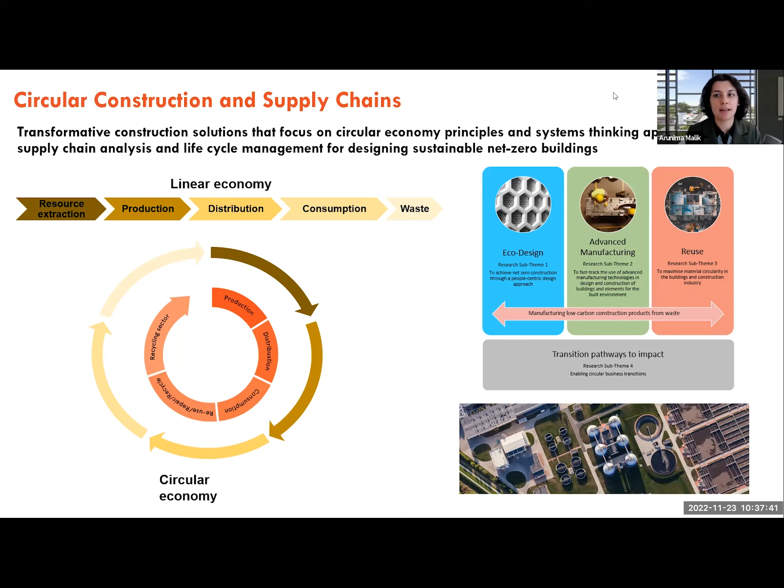There are a number of research themes at the University of Sydney led by colleagues who are part of the Smart Sustainable Buildings Network. For example, Professor Ali Abbas is one of the co-chairs of the Circular Construction and Supply Chains cluster within the network. This research looks at eco-design, advanced manufacturing, reuse, and transition pathways to impact. There is a waste transformation research hub, and the idea is to come up with transformative construction solutions that focus on circular economy principles and systems thinking approaches, using supply chain assessment or life cycle assessment techniques for designing sustainable net zero buildings.

We are also working on the supply chain aspect in detail, developing an industrial ecology virtual laboratory at the University of Sydney, which aims to consider environmental, social, and economic impacts in a holistic framework. Environmental could be looking at biodiversity threats, emissions, energy use, or sustainable use of water and land. From a social perspective, we're starting to look at modern slavery as an indicator relevant to the construction sector and its supply chains. We have employment and occupational hazards, such as accidents at work, as an indicator we're working on in collaboration with the International Labour Organization, holistically within this platform being developed, the Global Industrial Ecology Virtual Laboratory.

These are the indicators which can be used for measuring the supply chain performance of construction materials and construction sectors. The idea is to look at embodied impacts, whether it be embodied environmental, social, or economic impacts, and not just direct impacts, but also impacts in the supply chain.

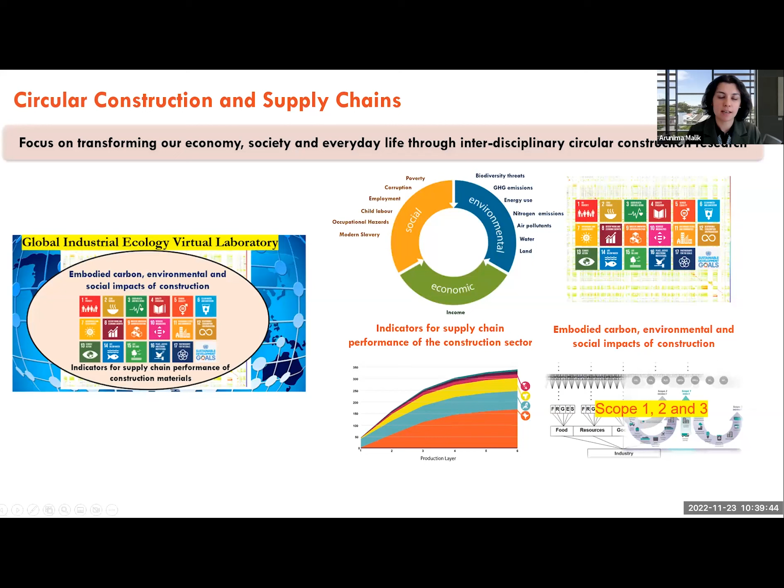This is all being presented as a brief snapshot as part of the Smart Sustainable Buildings Network, which brings together a number of clusters: circular construction and supply chains, sensors and automation, building efficiencies, building envelope, indoor environment, virtual design and construction, and legislation, regulation, and rating schemes. The aim of the network is to bring together expertise from different schools - science, engineering, architecture, law, and other faculties across the university - in a multidisciplinary approach to tackle the issue of circular economy in construction.

The smart building blocks include indoor environment, building efficiencies, and also a management point of view. This Smart Sustainable Buildings Network brings together not just academics, but also industry and government bodies.

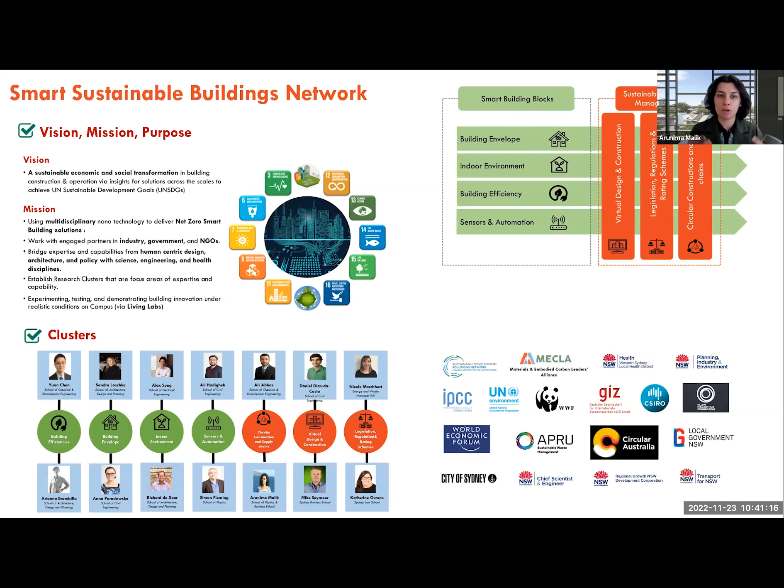Academics at the University of Sydney have active collaborations with the United Nations Sustainable Development Solutions Network, other UN bodies, Transport for New South Wales, local and federal governments of other countries, GIZ in Germany, the World Economic Forum, and the City of Sydney. The aim really is to have an interdisciplinary approach, not just academic, but also with strong links to industry.

On that note, we are very fortunate to have Valentina with us today. Valentina Petrone is WSP's Circular Economy Lead in Australia. She has unique skills combining 15 years of experience as a trained architect, focused on implementing sustainable and climate resilient practices in the built environment, with in-depth knowledge of circular economy design principles at different scales of intervention. She studied at TU Delft University, a leader in circular economy education in Europe, and has successfully delivered pioneering circular economy projects in Australia with a focus on community engagement.

We're very fortunate to have Valentina join us today to give us an industry perspective on the need for shifting from a linear economy approach to a circular economy approach, the design principles, and of course the case studies I'm very much looking forward to hearing.

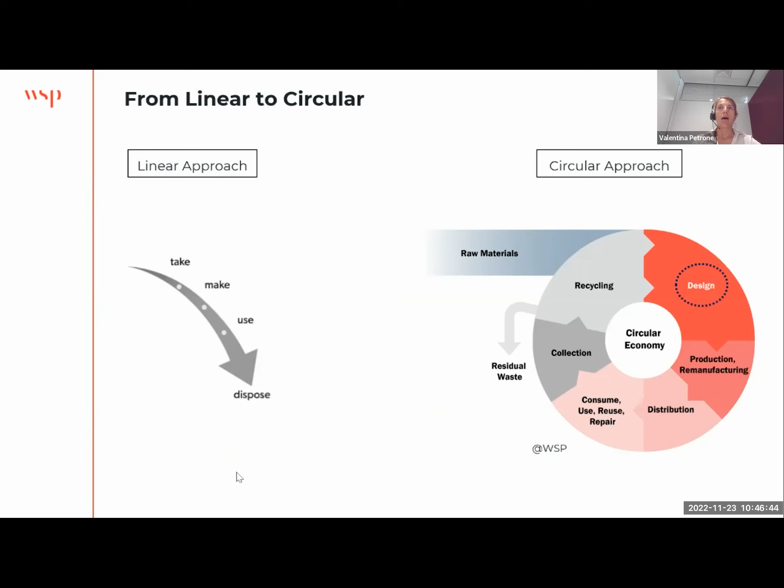Another very powerful image is the one on the screen, which links back to circular design thinking and the need to shift how we approach materials and the cities where we live. It's the shift from what everyone is familiar with, the 3 R's. We used to know the reduce, reuse, and recycle principle. They're still very valid, but now they are expanded.

Now we talk about up to 10 R's, and where we want to really focus to promote a circular design thinking shift is the first 4 R's. So refuse—what we can really refuse as end customers, but also as designers, how we can rethink the way we design our products and built assets. Reduce—how we can reduce the amount of raw materials we use. And reuse—how we can keep those materials in use at the highest value for as long as possible. Then down through the pyramid, of course, all the other options are available to guide our design thinking.

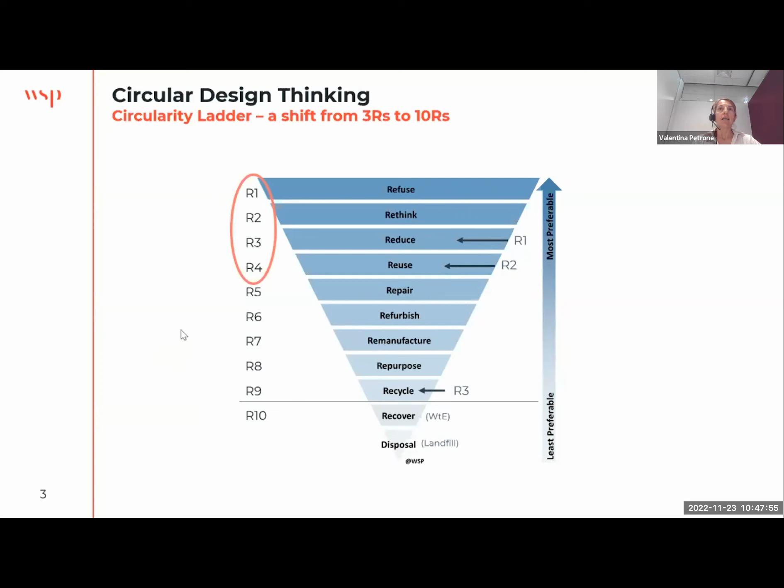And how this all links back to another big topic we are discussing today: what is the link between circular economy and net zero?

So we know that, as Arunima mentioned, the 55% of emissions caused by energy production and use are usually embedded under scope 1 and scope 2 emissions. The big next step is how we reduce scope 3 emissions, and we really dive into those to try to achieve those targets of zero emissions.

It's very important to see that embodied carbon is a key player in terms of where we can act to reduce emissions, but also demolition and construction waste generation reduction is very important. Fit out waste also plays a big role in scope 3 emission generation, and food waste sent to landfill, we all know, is not a good outcome.

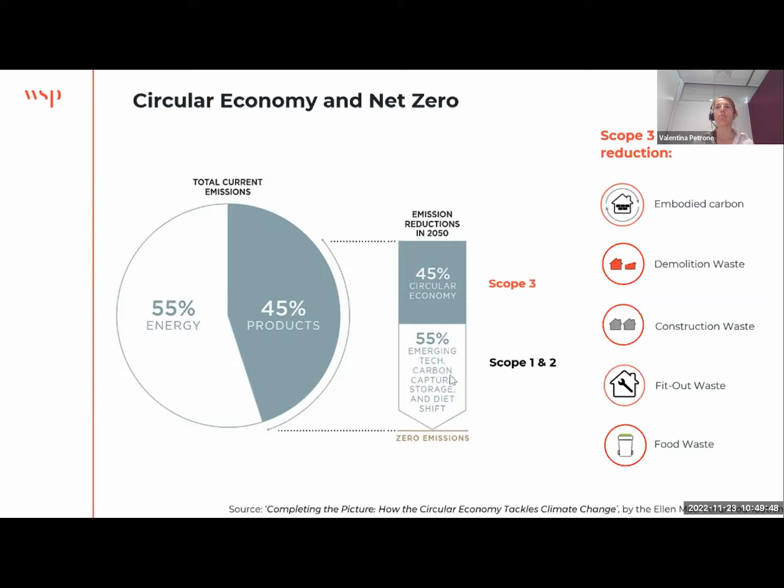As I mentioned, the goal is to start from the top of the hierarchy—really reduce what we create in the first place, and then try to better use the materials that we still have available in the cycle.

And when we get into the built environment, it's not easy to implement those 10 R's and that approach. My work, I'm very fortunate to work with design teams on multiple projects and facilitate and guide the design teams through the implementation of the so-called circular design principles and strategies.

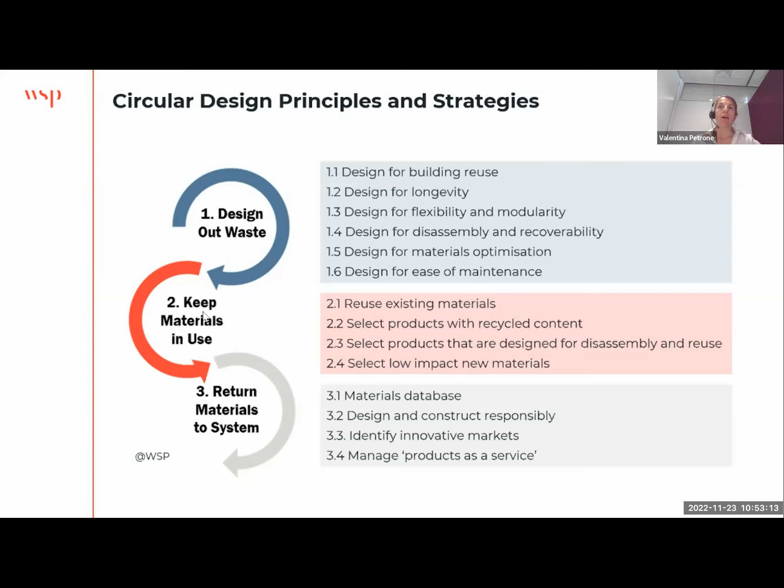In the following slides, I've just added a few visual examples. I always love to show some research about what things could look like. So designing for longevity is very important. As you can see on the right, this is a breakdown of the concept of building by layers. What about if we start as designers to design our building assets according to the expected longevity of each layer of the building? As I mentioned before, what about the skin?

We know the skin will last much less than the structure. So what about if we have a second skin which can be easily disassembled and replaced as needed, while we keep the structure as strong as possible?

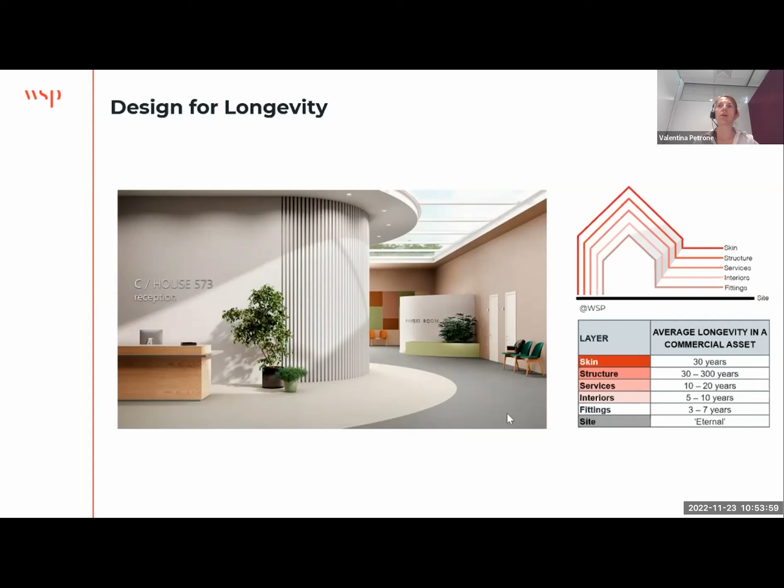Design for flexibility. This is one of my favorite examples back in the Netherlands: simple ways to install operable partitions and even operable planters to keep the space as flexible as possible.

And back into keeping materials in use, how can we start using product as a service? We are all familiar with lighting as a service, but even elevators can be rented. The important shift is that if we start to rent a product, we have an agreement where we establish the performance expectations, and it's up to the manufacturer and supplier to meet those expectations agreed in a contract. So it's up to them to use more durable materials, and they will be able to easily repair those elevators.

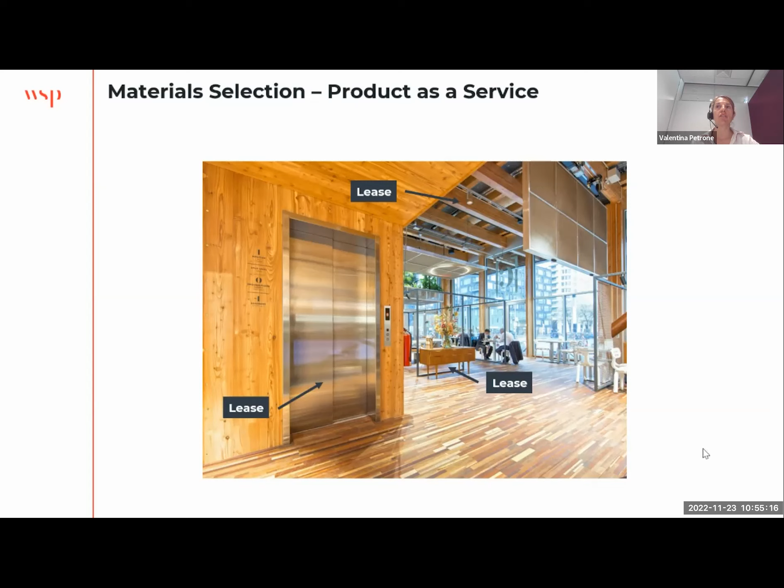So back to the example of the washing machine at the beginning, if we shift from ownership to leasing, we will push the suppliers and manufacturers to be able to repair those materials. Otherwise, it will cost them too much money to run their model. So it's a shift, an economical shift as well.

And looking at take-back schemes, a famous one is the carpet tiles here in Australia. If we think about any office fit out, usually, unfortunately, at the end of the tenant's leasing agreement, everything in the office gets stripped out. Most of the time everything ends up in landfill as fit-out waste, and then the new tenant just refits the space from scratch.

What about if we have a take-back scheme agreement? The same supplier of the carpet can come collect and remove the old carpet and reuse it, either as is if still valid, or at least recycle it back into their own system with a guarantee of a closed loop.

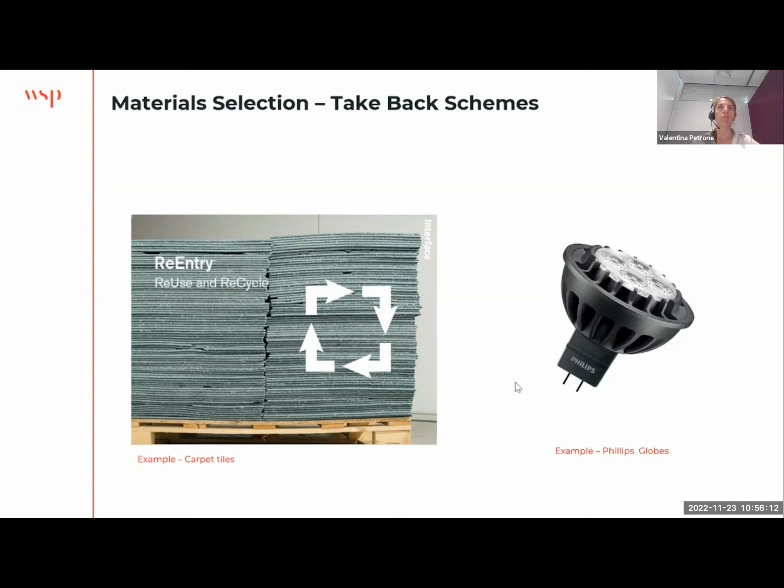The usual big question I get asked is how do we realistically do this in the construction industry? The answer is that key stakeholders really need to work together. Starting from the design, we try to make the best design choices to ensure circular economy is embedded at a very early stage. Procurement is a key step, but so is the construction phase, where we need to work with contractors and builders to support and enable them, ensuring what has been designed actually becomes reality.

If we think about the different project phases, the operation phase of a built asset can be 50 years or more. In that space, there are lots of opportunities to reduce construction and demolition waste generated, and end of service is also very important. We need to ensure there is enough cooperation and communication, and that materials are not just taken to landfill because that's the business-as-usual approach, but that there is actually a conversation.

Ultimately, what if end of service, or end of use, becomes the new first step of design? If architects and design teams have access to a so-called materials bank, so we can access the materials we know are already available in our cities to be used and reused as a starting point for a new building, that will definitely help us meet those net zero targets.

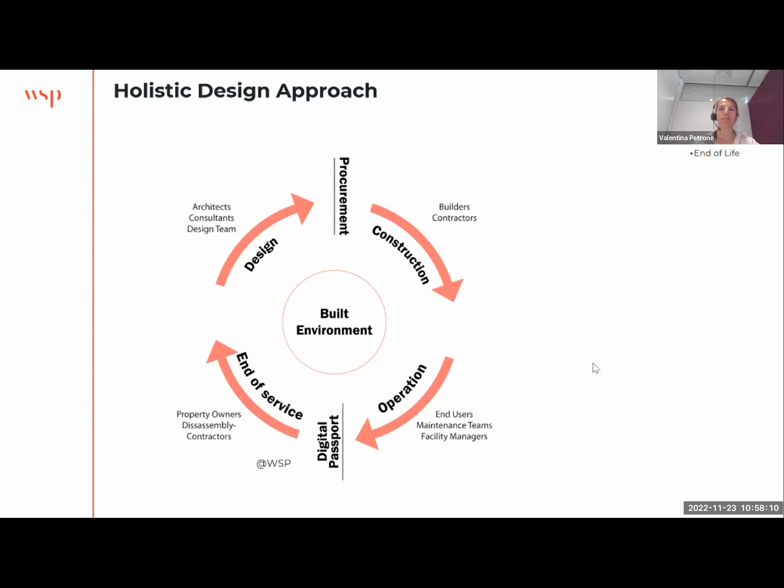In terms of embedding circular economy in design, also from project scales and initiatives, there definitely needs to be a lot of collaboration across different building scales and with government. Starting from policy and guidelines, I was pleased to be working with New South Wales DPE to deliver their first circular design guidelines for the built environment, which will be released soon. It's very important that government really shows the way and maps how this transition to a circular built environment could look.

I've been working on three major master planning and precinct projects across Victoria and New South Wales. Again, there is a great opportunity at that scale, very early stage, to define targets and set the right direction for future developments to follow the pathway ensuring circular economy principles are embedded into the design. As an architect, I'm well aware that once the major constraints to a site have been established, it's much more difficult to deliver a good building and achieve the good results we want.

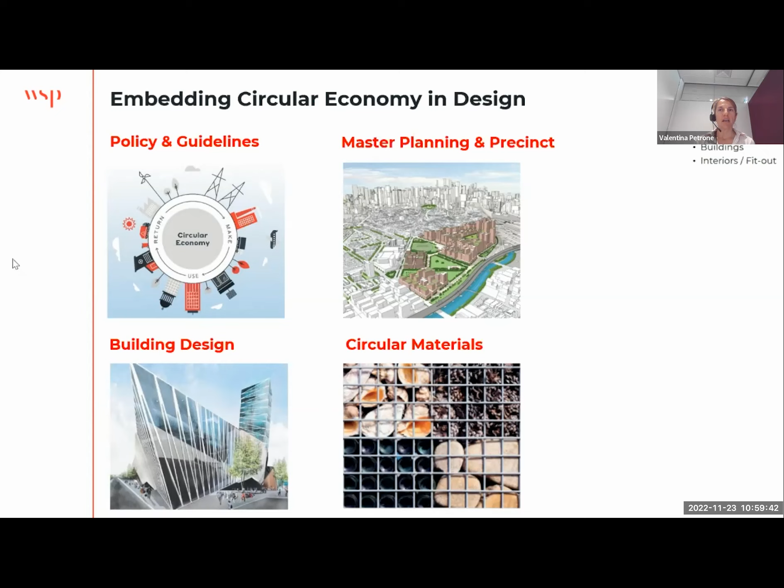Building design, and of course selection of circular materials, is very important. I'll finish my contribution by sharing an interesting example we've been working on with the CSL laboratory, where we've been developing a circularity assessment tool with them. We started working with the design team early in the design, discussing those design strategies - what elements can be retained of the existing site, what can be refurbished.

When planning for new elements and new additions, how can we ensure those components can be easily disassembled? How can we ensure flexibility in design? And then, on the back of the newly released Green Star circular economy innovation credits, we started to map out the difference between a standard business-as-usual approach to material selection and a more circular economy selection.

At this stage, it should be noted that the requirements for the credits mainly look at whether the material is virgin material or reused material, and the percentage of recycled content. But the next step we're working on as a team is how we can identify the benefits of embedding circular design strategies in terms of design for flexibility and disassembly - how can we really measure that and ensure it is captured?

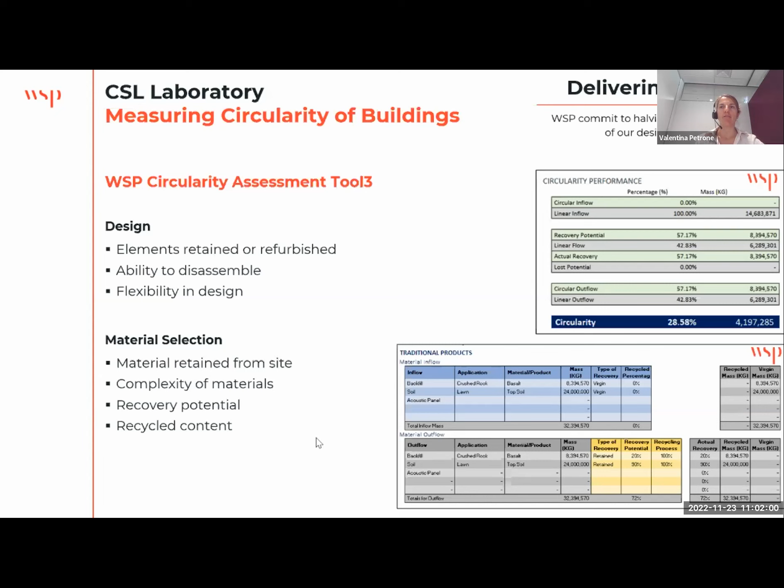Because the challenge we see, coming from industry and talking every day with clients, and of course money is a big driver in the conversation, is how we can demonstrate that those changes are not only beneficial to the built environment and to our whole environment in meeting net zero targets, but also ensure we are proposing something that is commercially viable. So that is the direction we are heading.

Thank you, that's my little contribution to today's conversation. More than happy to answer any questions at the end.

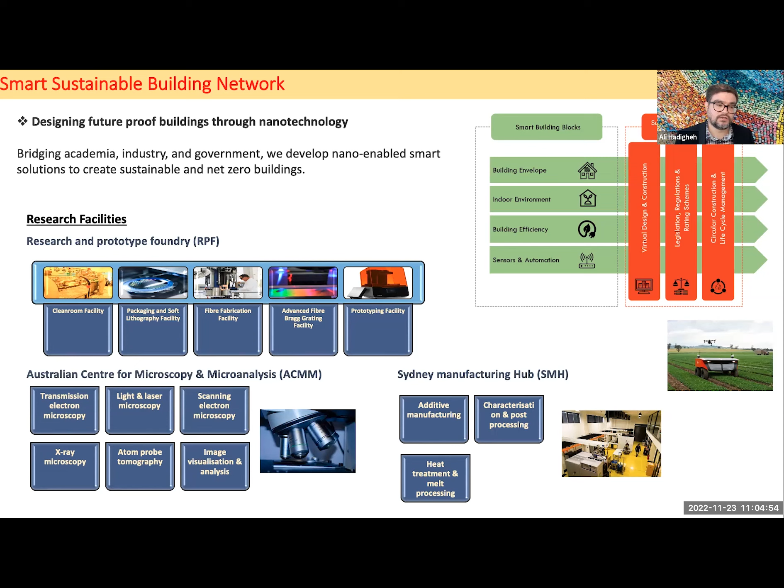The university is home to various state-of-the-art facilities, such as core facilities like the Research and Prototype Foundry, Sydney Manufacturing Hub, and the Australian Centre for Microscopy and Microanalysis, and also research centres such as Field Robotics. For instance, through RPF we are well positioned to fabricate advanced fiber optics for academic as well as industry research purposes.

Our approach integrates a range of technologies for infrastructure monitoring and health prognosis that helps us increase sustainability by reducing emissions, reducing consumption, and environmental impact. This is mainly achieved while we also maintain occupant comfort by enhancing indoor environment quality.

As a result, the vision of this cluster, the Sensors and Automation Cluster, is to use sensors in building systems for optimizing functionality and minimizing energy consumption in our buildings. This enables development of efficient, reliable, and functional sensing systems that connect critical environmental variables with building control systems by using AI algorithms to process data and signals from sensors in order to increase design efficiency.

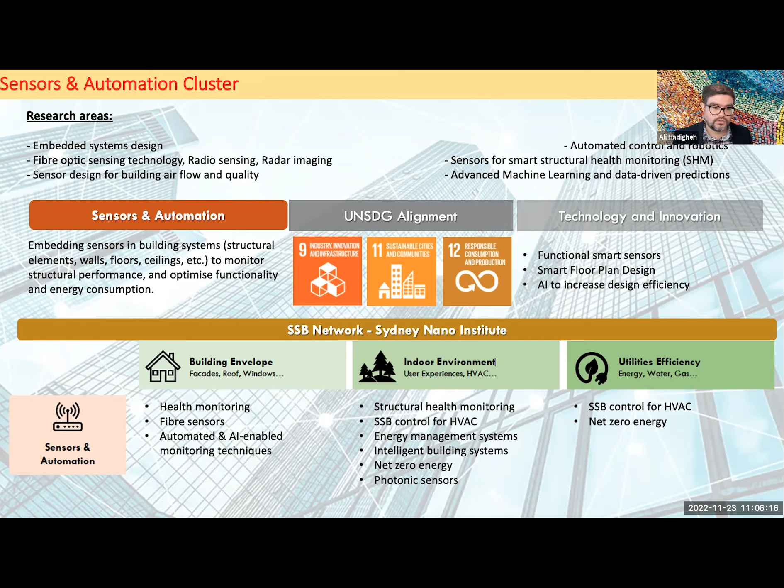So, now I would like to introduce Mr. Harish Srivastava. Harish is currently Director of Civil Engineering within the Advanced Technical Services Unit of the Infrastructure and Place Division of Transport for New South Wales. He is Transport for New South Wales' representative to SmartCrete CRC and is managing a portfolio of research projects involving the development of low carbon concrete mixes, including recycled materials, and sensors and digital twin based asset management technology. Harish has over 25 years of proven track record of leading the delivery of complex projects across the entire asset and project life cycle, including feasibility, concept, and detailed design, construction, commissioning, and operation. Harish is a recognized chartered civil and structural engineer of Engineers Australia.

So by that, I leave it to you, Harish, for your presentation.

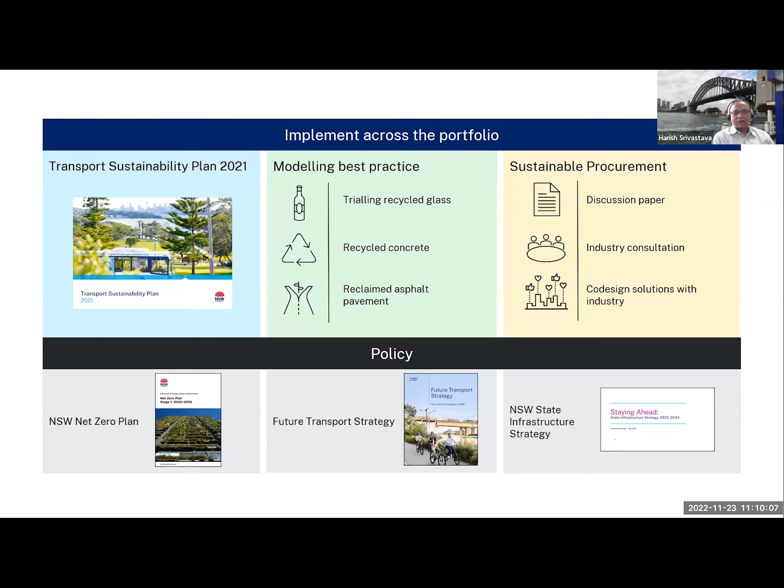So I guess that's basically the key enabler for use of recycled material or low emission building materials in our projects. Now I'll talk about some case studies. I guess that will be the best reflection of what we do, and whether we do it successfully or not, or whether there is some gap.

So our approach to sustainability in our projects is to try to incorporate low emission building material as best as possible, then try to replace some of the constituents of the materials with low carbon footprint material, and partially replace wherever possible the virgin material with recycled material, and then pursue dematerialization. Even if you end up using a higher strength material, if that reduces the overall quantity of material needed, that is basically the best outcome in terms of sustainability.

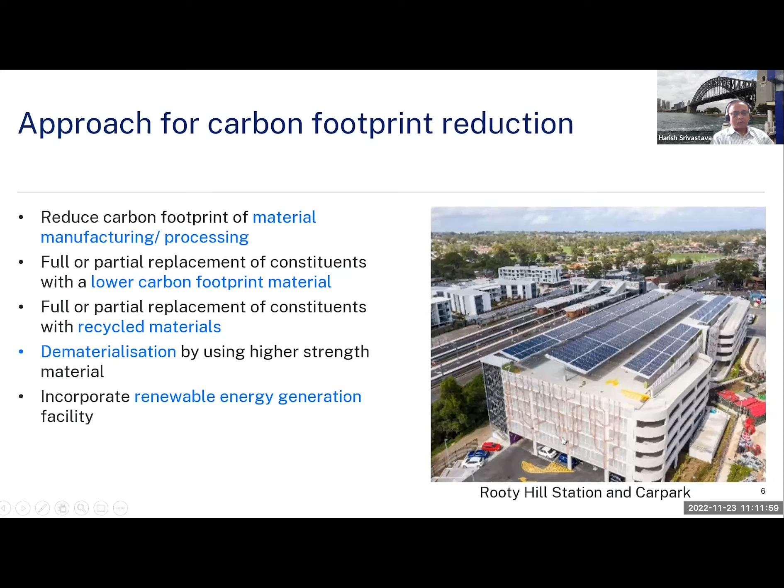Now I'll talk about two or three selective materials. First, cement concrete. As we know, this is one of the most consumed materials, and some stats say it's probably the second most consumed material in the world after water. In Australia, we consume about 29 million cubic meters of concrete. Concrete is a very simple mix: cement, aggregate, water, and some admixture.

If we look at a typical mix, cement is about 12%, whereas aggregate is about 77%. Out of the total embodied carbon of anything from 200 to 600, about 900 to 1000 kg per ton embodied carbon is attributed to cement. So even though cement is only 12% of the mix, it offers one of the highest return constituents, where if we can replace it, we get good return in terms of decarbonisation or lowering the carbon footprint. Aggregate, being 77% of the mix, offers the highest opportunity for incorporating recycled material.

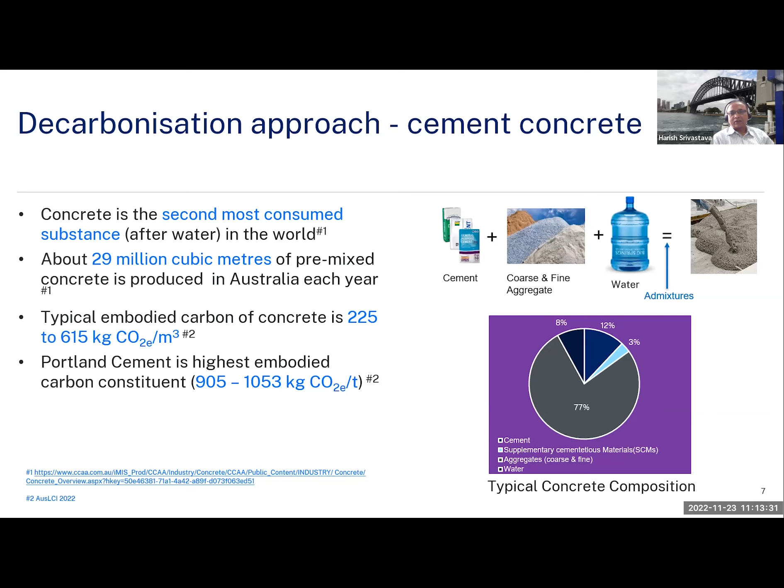Moving forward, if you recall the second slide, one of the pathways was to replace high emission material with low emission material. Supplementary cementitious material has embodied carbon of the order of 20 to 25 kilo per ton, about 1/40th to 1/50th of cement. This is probably one of the easy solutions to partially replace cement. Transport specifications allow up to 30% replacement by fly ash and about 65% use of slag. At the moment we're also working with the SmartCrete CRC on developing LC3, which will be an alternative binder. The pictures on the right show a real-time example where transport actually used fly ash and slag as a binary or ternary blend.

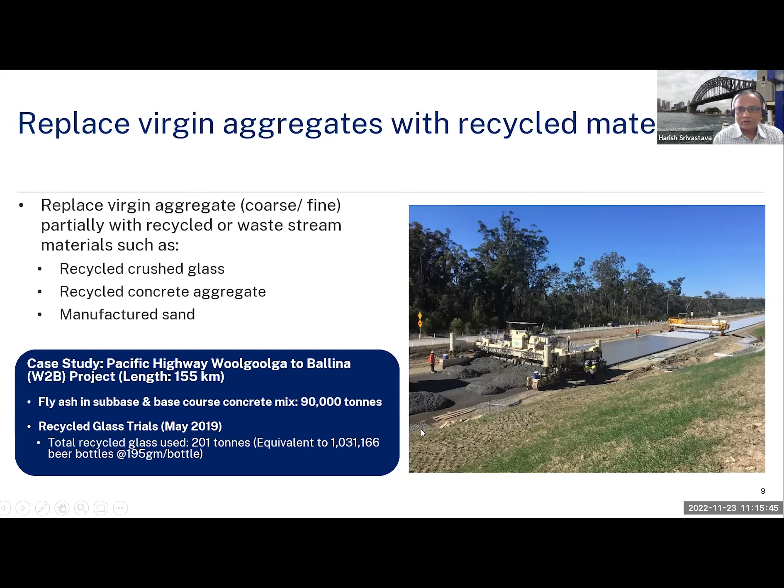The next slide shows the replacement of virgin aggregate with recycled aggregate. Our specification allows use of recycled crushed glass, recycled concrete aggregate, and manufactured sand. A good example is the Pacific Highway construction from Woolgoolga to Ballina stretch, where about 90,000 tons of fly ash and 201 tons of recycled crushed glass were used, for the first time on a motorway project. To put it in perspective, this 201 tons of glass equates to over a million beer bottles - that's a lot of bottles to go into the road.

The second material is asphalt. We could probably dedicate a full session to asphalt, but the highlight is that asphalt is again a mix of bitumen and aggregate, and with heat input it is converted into a blend. It is not as high emitting as concrete, but it's about 35 kilo per ton.

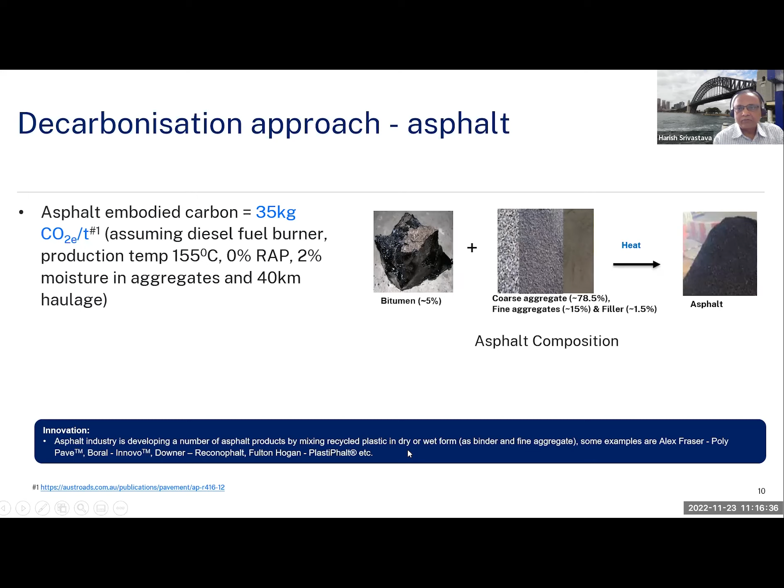There are certain commercial products coming to the market, listed below. I'm not going to read them all, but basically the industry is actively working on alternative products which have a significant amount of recycled material. Transport specification allows use of up to 50% RAP, reclaimed asphalt pavement, which is quite in line with the circularity principle Valentina was talking about. RCG is recycled crushed glass - in the base course we allow up to 10%, and in the wearing course up to 2.5%. This is a good opportunity to incorporate recycled material.

We also use crumb rubber and steel furnace slag to enhance the properties of the asphalt. Crumb rubber is used to enhance reflection cracking resistance, and steel furnace slag is used for improving skid resistance, which is quite important in areas like intersections.

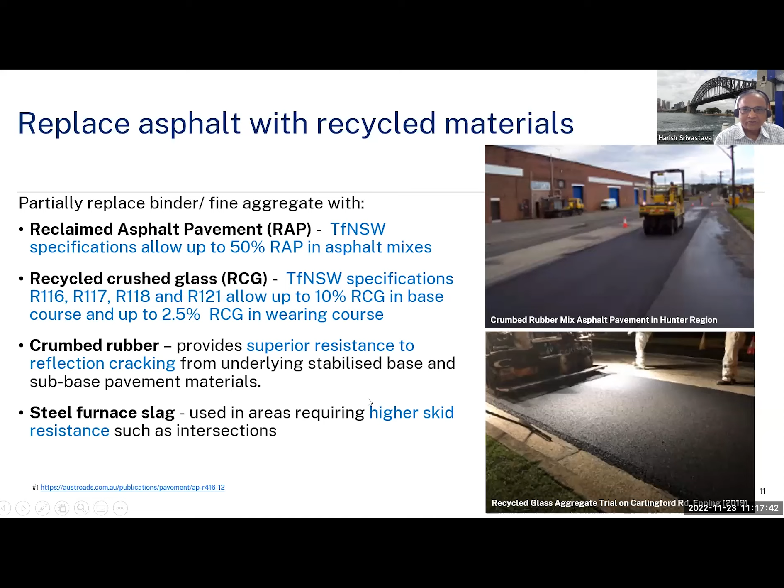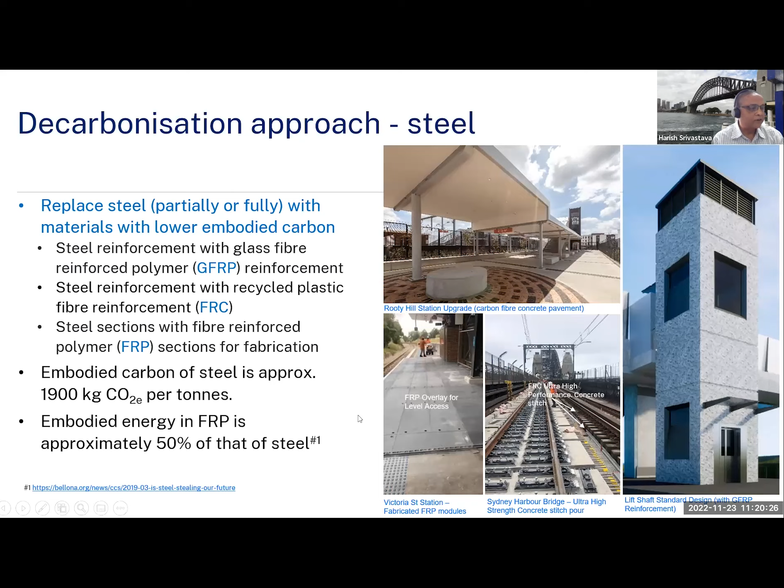After the case studies where we have already used recycled material, I'll talk a bit about the research project we are doing. With SmartCrete CRC, Transport is a core partner and is undertaking research with various universities. First in line is University of Sydney, and second is University of Queensland.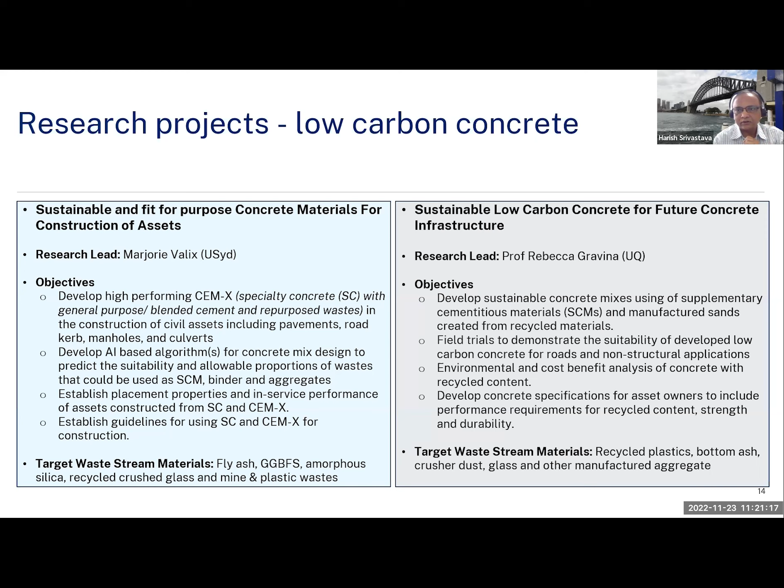The theme of these two projects is to test a large number of recycled materials in the concrete mix and see whether we can achieve an acceptable design for using these new concrete mixes in structural and non-structural applications.

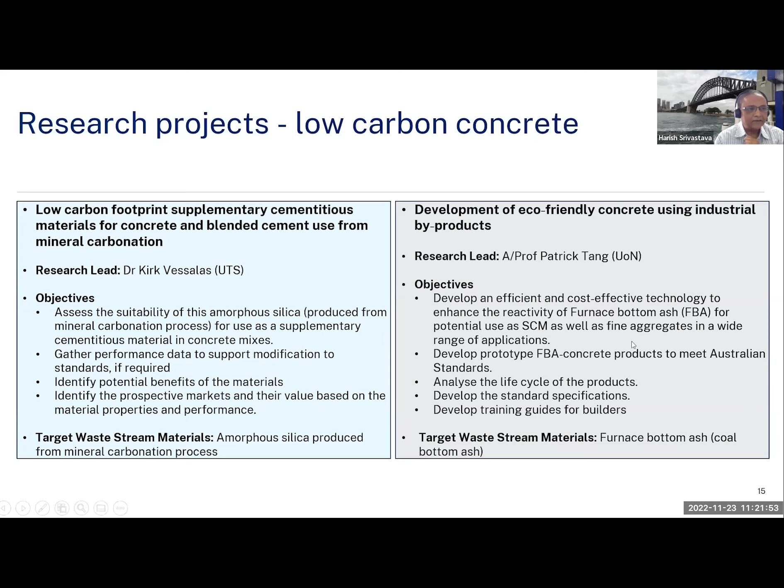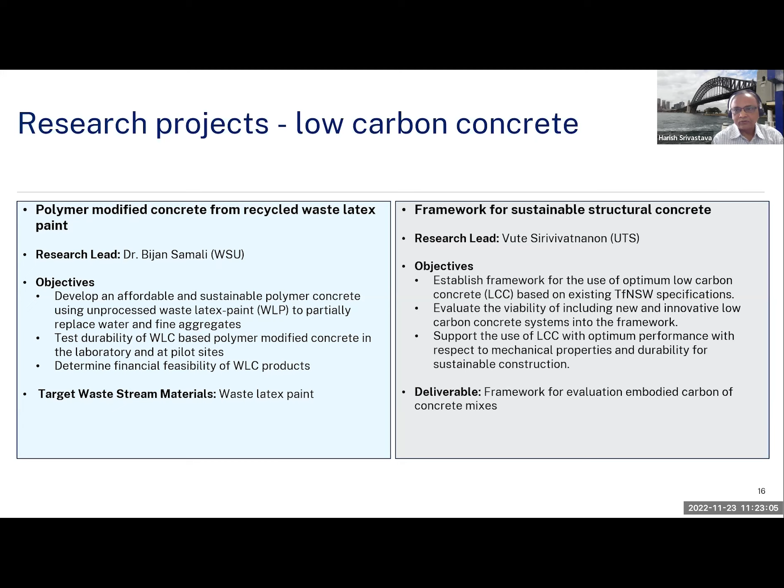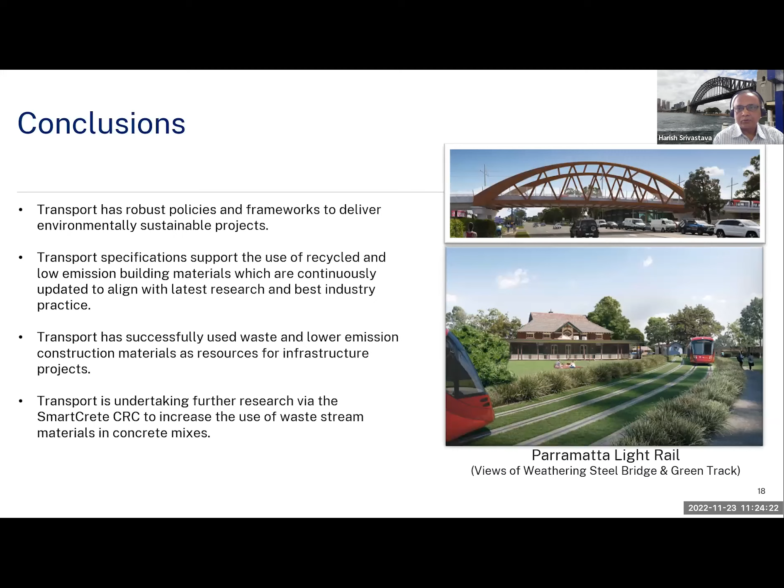With all this, I hope to demonstrate that Transport has robust policies and frameworks for delivering environmentally sustainable projects. Our specifications support the use of recycled and low emission building materials, and we have successfully used waste stream and low emission construction materials in our projects. We are also undertaking further research to beef up this portfolio of available materials.

I guess that's probably it from me. I'm happy to answer any questions whenever the facilitators ask me to.